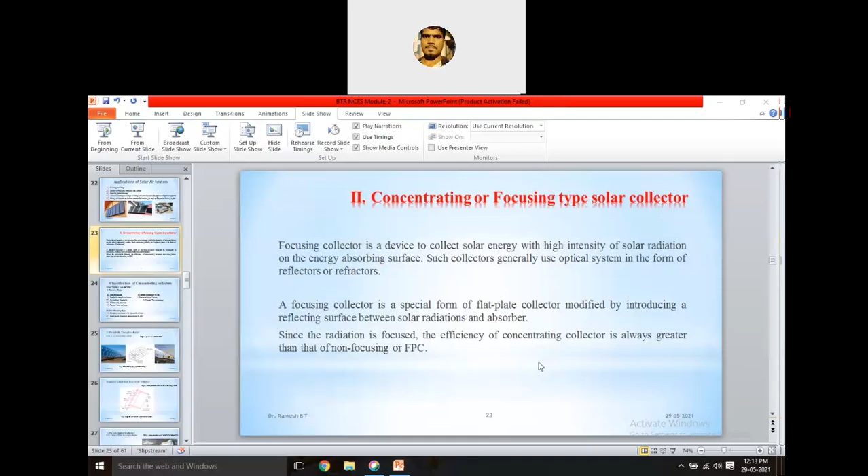Yesterday we discussed another type of flat plate collector, that is the air heater. So there are two types of flat plate collector: one is a liquid type and the other is a solar air heater. Yesterday we briefly discussed the solar air heater, and also introduced what is meant by a concentrated or focusing type of solar collector. This focusing type of collector is very special compared to the flat plate collector we already discussed. This type of collector is modified by introducing a reflecting or refracting surface.

That is what we call the concentrator, the reflecting or refracting surface. So between the solar radiation and the absorber, we place one surface, that is the concentrator. It is also called a reflecting or refracting surface.

This type of collector can have radiation increased from a low value of 1.5 to 2, up to a high value of 10,000. So this is the range of this collector, and in this collector, radiation falling on a relatively larger area is focused onto a receiver, focused at a point or a line. It is called the absorber, of a considerably very small area.

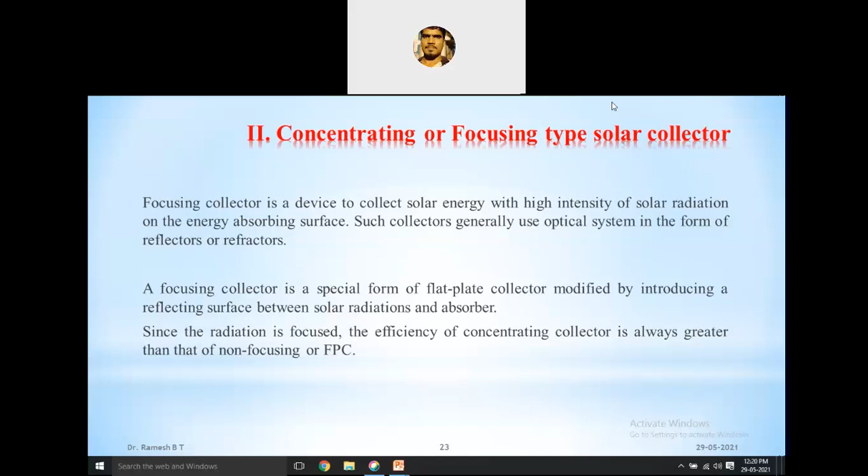Some of the classifications we also discussed yesterday. The concentrating or focusing collectors may be classified in general into two categories: one is line focusing and point focusing. So in focusing type there are two types: line focusing and point focusing type of collectors. And as per the number of concentrated collector geometries, there are so many types.

Line focusing can be classified as either parabolic trough collectors, also called cylindrical parabolic collectors, mirror strip reflectors, and Fresnel lens collectors. These come under line type focusing. And if you go with point focusing type, there are paraboloidal collectors and the central tower concept, either central tower concept or paraboloidal collectors.

Another type is also there, that is the non-focusing type: the flat plate collector with adjustable mirror, meaning a flat plate collector with some adjustable mirror. The second one is compound type, meaning it's a mixture of both. So compound parabolic concentrator is called CPC.

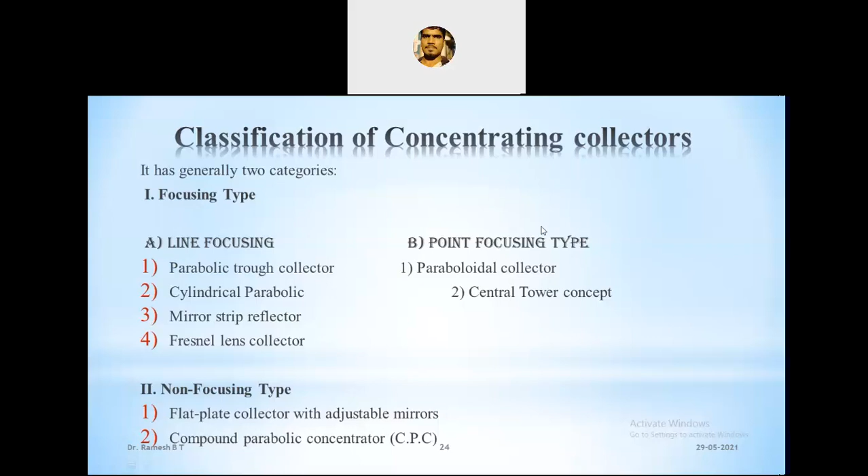So firstly we are going to discuss the concentrated or focusing type. In line focusing, that is the parabolic trough collector. This is the first type of collector, and in the examination you may get this as a possible question: with a neat sketch, explain the parabolic trough collector or cylindrical type of collector.

This comes under the line focusing type of collector, and is called a parabolic trough collector. Now the principle of this parabolic trough collector: in the figure you can observe there are three figures. The first and third figures are the practical implementation of this parabolic trough collector, and the second one is a pictorial representation of this parabolic collector.

Sun rays fall directly onto the curved shape, called the vertex or parabolic reflector. The sun rays fall directly onto the vertex or parabolic reflector, and it reflects those radiations to a particular line, called the focus. It focuses at a particular line, and that line is formed by the absorber, which is in the form of a line. That's why it is called a line type of focusing collector.

So the principle of this parabolic trough collector, which is often used as a concentrating collector: the solar radiations coming from a particular direction, as you can observe in the figure, are collected over an area of the reflecting surface. That is the vertex, the reflecting surface, which is in the shape of a parabolic reflector.

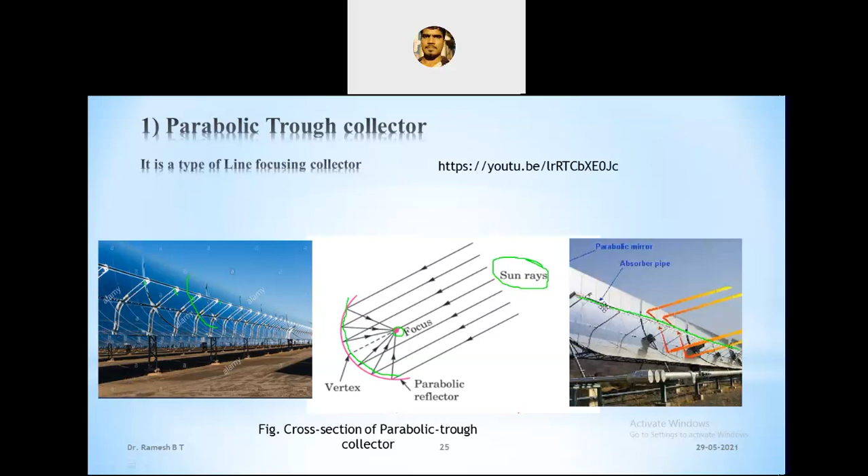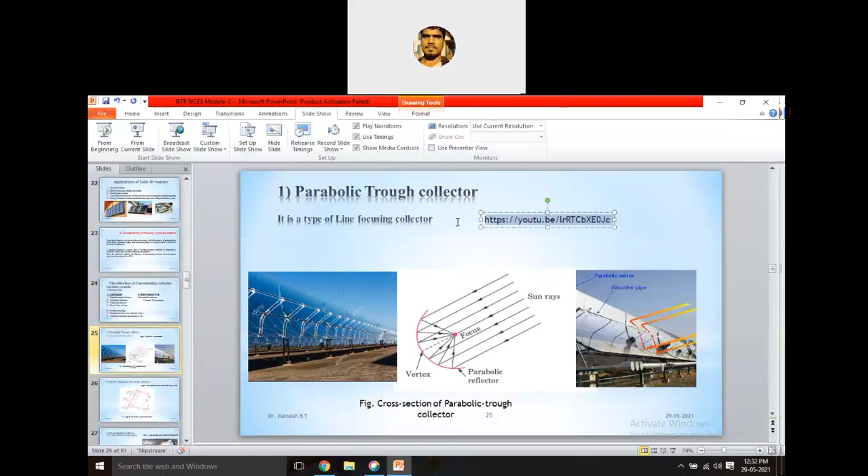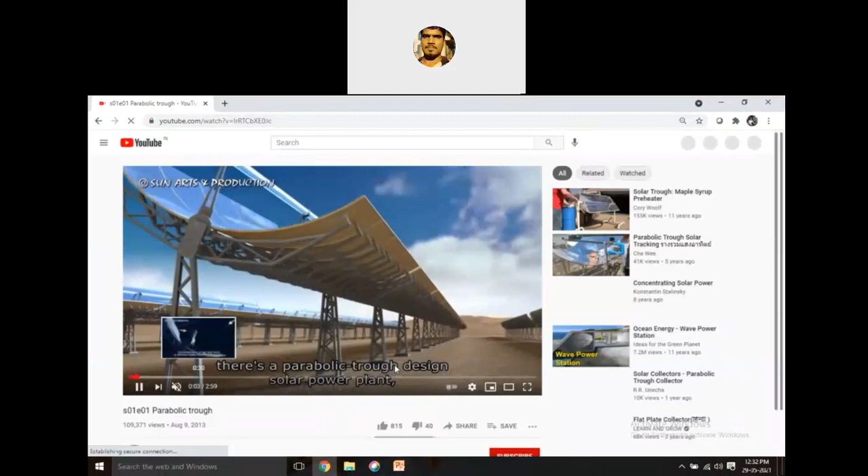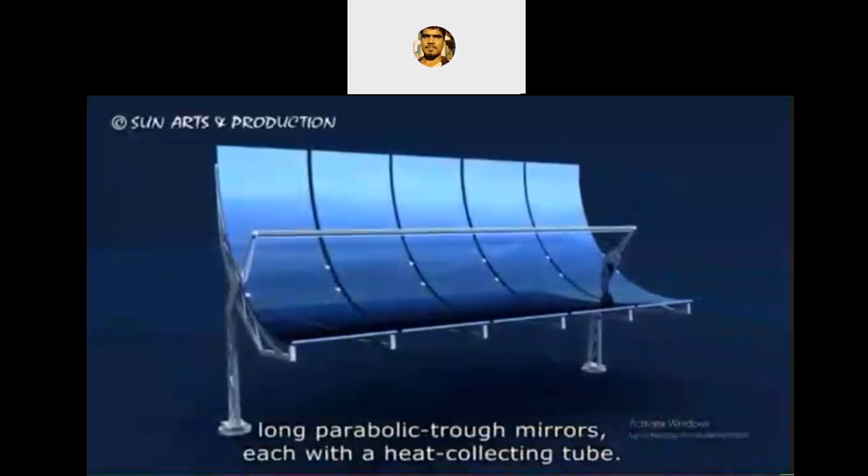The working of this parabolic trough design. This is a number of units in series and parallel. You can observe n number of units are installed in series as well as in parallel for maximum heat storage. See how the solar rays are falling on the paraboloid or cylindrical reflector and concentrating at a particular line called the absorber.

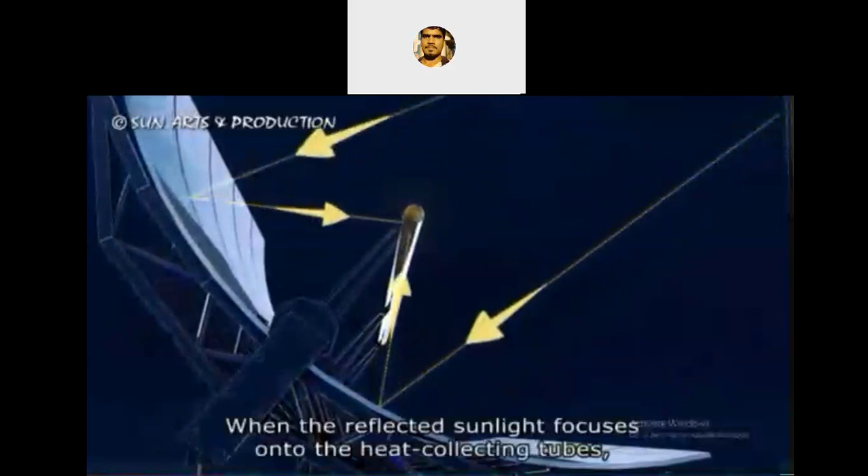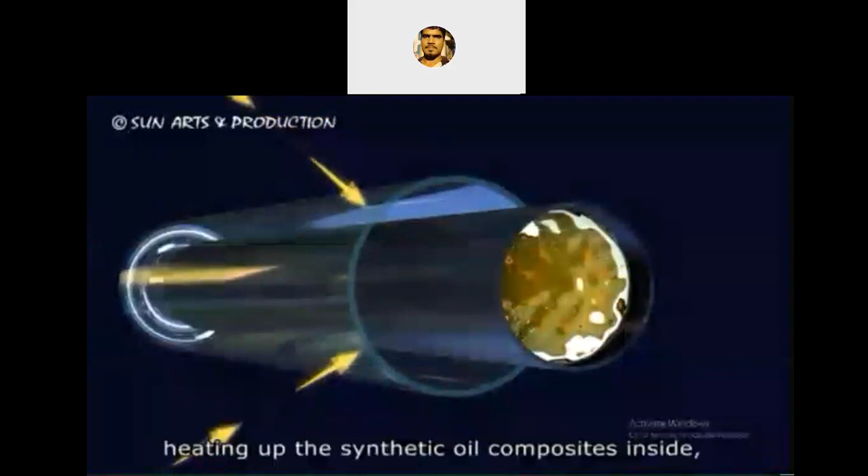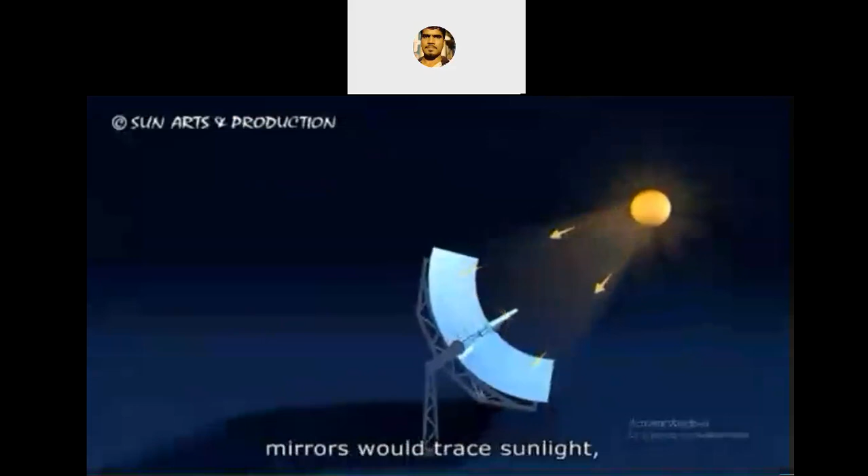The reflected sunrays are absorbed, and it is covered by glass as well as an absorber plate or tube. The absorber tube is made of aluminum, as I told, with silverized material, so that it will increase the absorbing capacity. In that tube there is a flow of either fluid, gas, or air, and this is continuously connected to all the units.

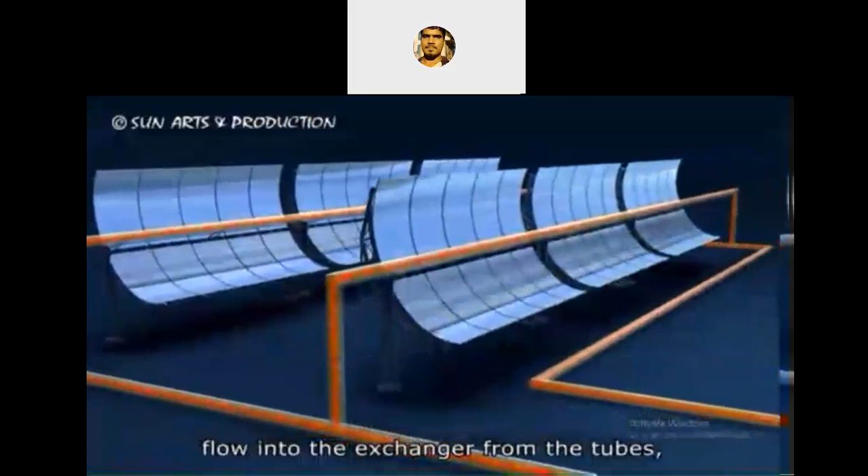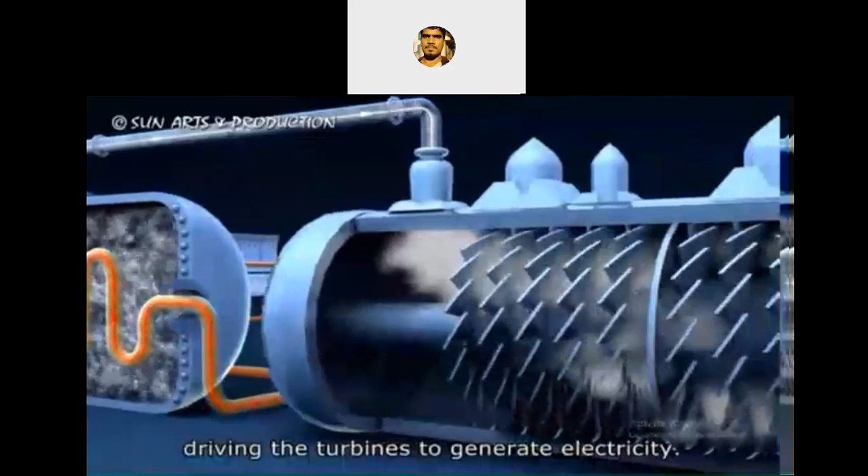Finally it goes to the next section, the conversion, where it will convert the hot air or hot fluid into steam, and that steam goes to the next section, called the turbine section, where it will convert heat energy to mechanical energy. Then next is the generator.

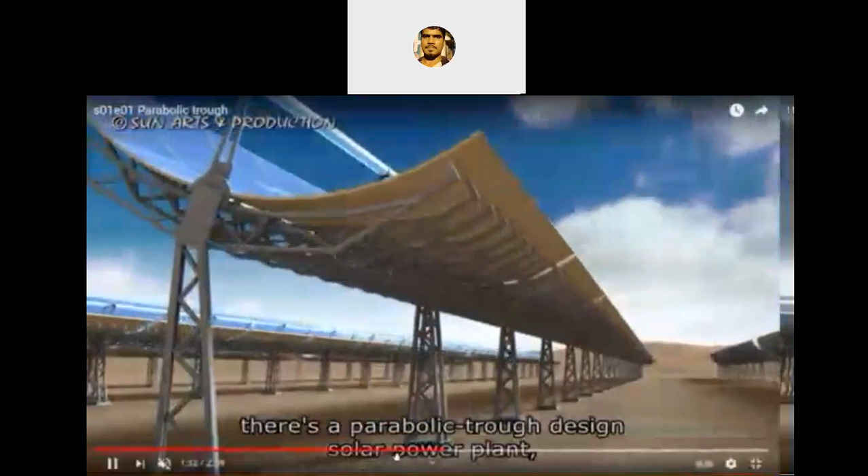So this is the conversion heat exchanger for the hot air or hot fluid from all the units. Here it will exchange the heat from the fluid flowing inside the coil, which is surrounded by water, and the water gains the heat from that fluid and changes phase from liquid to gas, so it becomes steam.

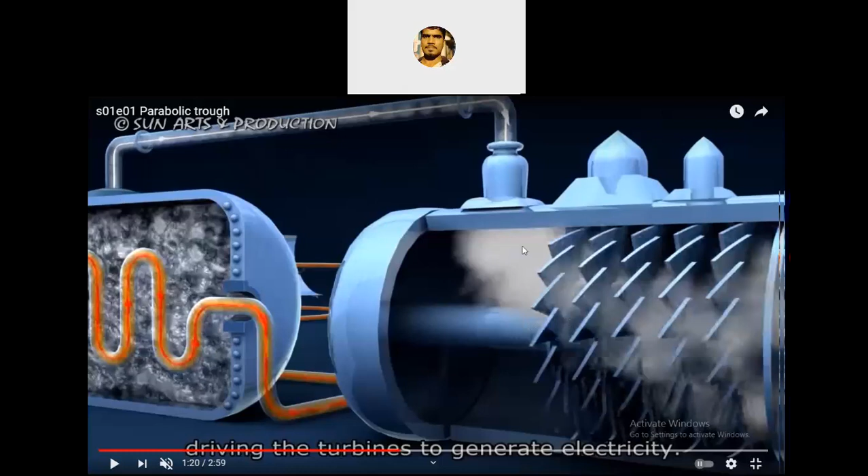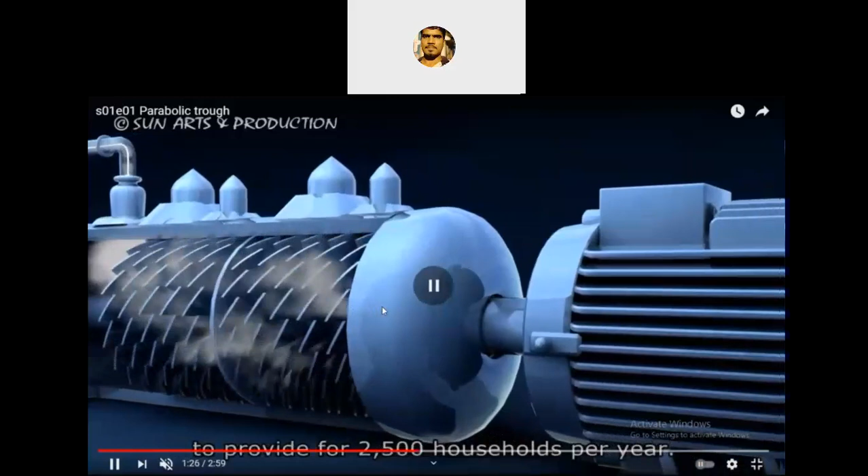That steam goes into the next section, called the turbine section. The steam has high energy, meaning high temperature as well as high pressure, and it is converted into work with the help of the turbine blades, converting heat energy to mechanical energy. Once it is converted to mechanical energy, it moves on to the generator, where mechanical energy is converted to electrical energy. This is how we can generate electrical energy and supply it for utilization.

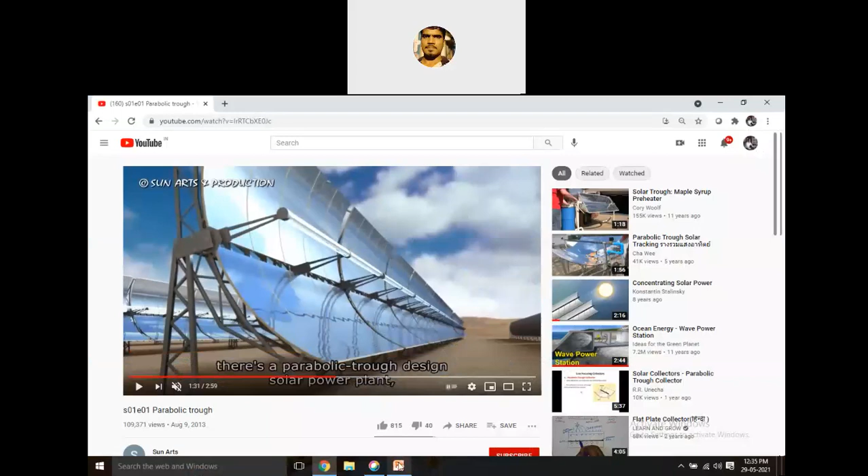Okay, yes, move on to the next, paraboloidal collector. Before that, another two important types of line type collectors are there. That is the mirror strip reflector. Okay, so the other two types of collectors are the mirror strip reflector and the Fresnel lens collector.

So the mirror strip collector is another kind of focusing collector. A number of plane or slightly curved mirrors are mounted on a flat base, and the angles of these individual mirrors are such that they reflect solar radiation from a specific direction onto the same focal line. Okay, the angle of the mirrors must be adjusted to allow for changes in the sun's elevation. That means the small mirror strips adjust their angle with respect to the sun; they track the sun. Okay, this is another type.

And one more type is the Fresnel lens. In addition to the reflecting collectors described previously, the refraction type of focusing collector has been developed, and it utilizes the focusing effect of a Fresnel lens. We are using a Fresnel lens to increase the efficiency. That's why it is called a Fresnel lens collector. Okay, so these are the other types of collectors.

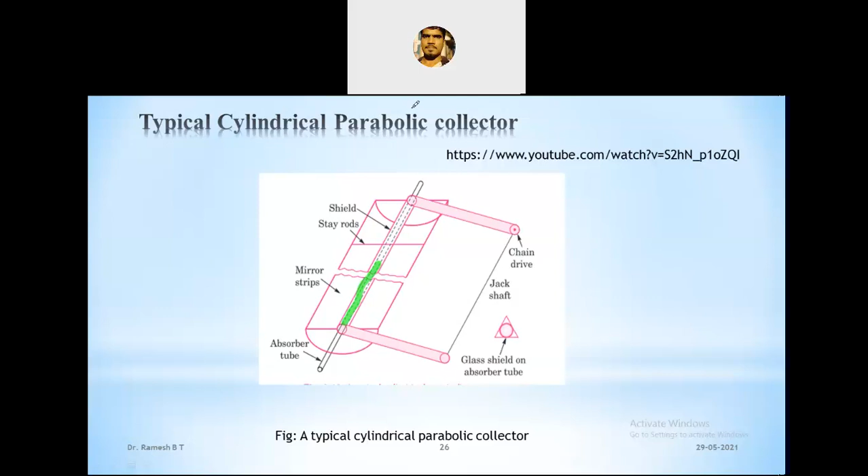A dish of general dimension is 6.6 meters in diameter, made from more than 200 curved mirrors. So here they placed more than 200 curved mirrors to construct this dish, segmented forming a paraboloidal surface, and the absorber is located at a focus in a cavity made of a zirconium copper alloy with a black chromium

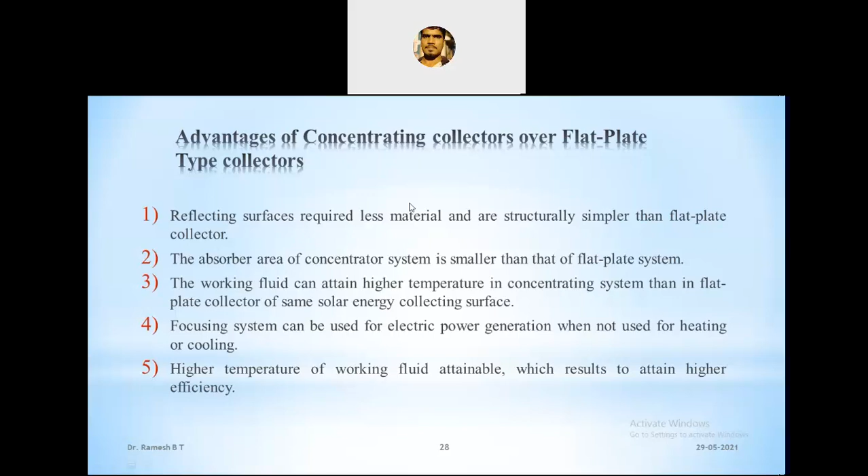Similarly, coming to the disadvantages of concentrated collectors over flat plate collectors: of course, they are not 100% advantages. They have some disadvantages or limitations when compared to flat plate collectors. The first one: out of beam and diffuse solar radiation components, only the beam component is collected, because diffuse radiation is not collected.

The diffuse component cannot be reflected. Only beam radiation, or direct radiation, is reflected, because it is not subjected to any deflection; it falls directly from the sun to the earth, so it will reflect on these surfaces.

But diffuse radiation is scattered radiation; it has already gone through some reflections and refractions, and if it is projected on the surfaces, it won't focus, it will be reflected anywhere into space, so only beam radiation is collected. But in the case of a flat plate collector, both beam and diffuse radiation are collected. That is one drawback.

In some stationary reflecting systems, it is necessary to have a small absorber tracking the sun image. In others, the reflector may have more than one adjustable position if year-round operation is desirable, and this would be costly, meaning it needs a continuous sun tracking mechanism, so it becomes more costly.